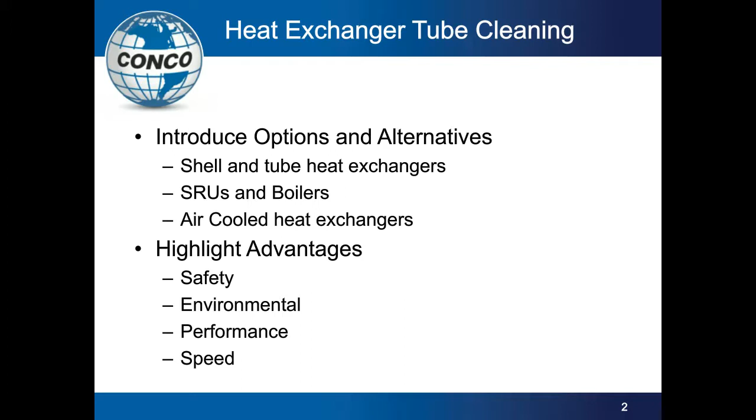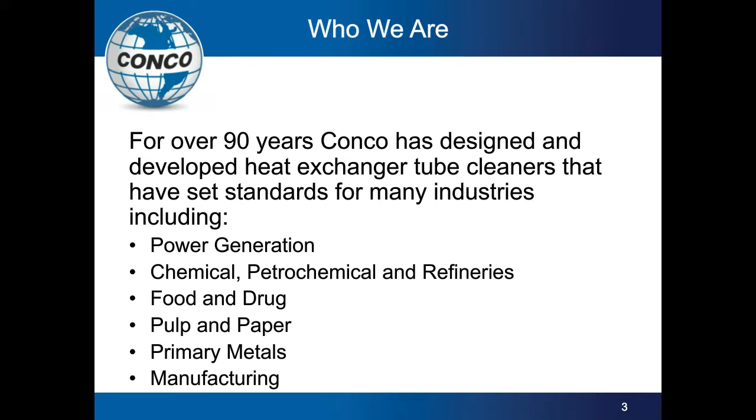Who we are: we've been around for 90 years. We are the leader in tube cleaning in the power generation field, and we're gaining a lot of market share and ground in chemicals, petrochemicals, and refineries. We have also worked in food and drug, pulp and paper, primary metals, and manufacturing.

Our tube cleaning technology uses custom-sized mechanical cleaners, drill bits, and brushes at a safe, low pressure or no water at all to thoroughly clean heat exchangers of all shapes and sizes. The difference is our technology is one of a kind, which maximizes safety, minimizes impact to the environment, produces a cleaner tube, and the key is at a much faster pace than high-pressure water.

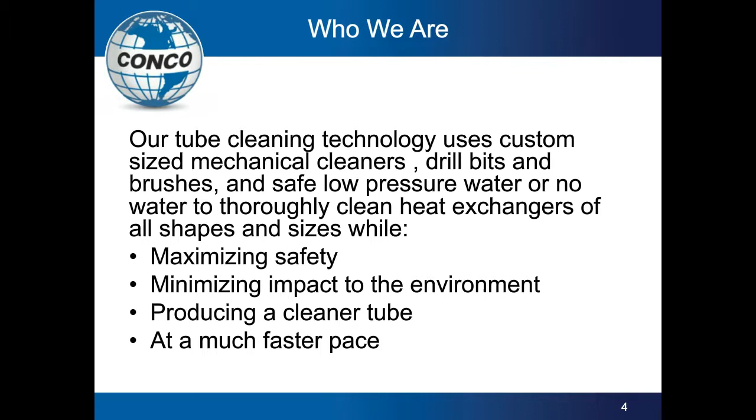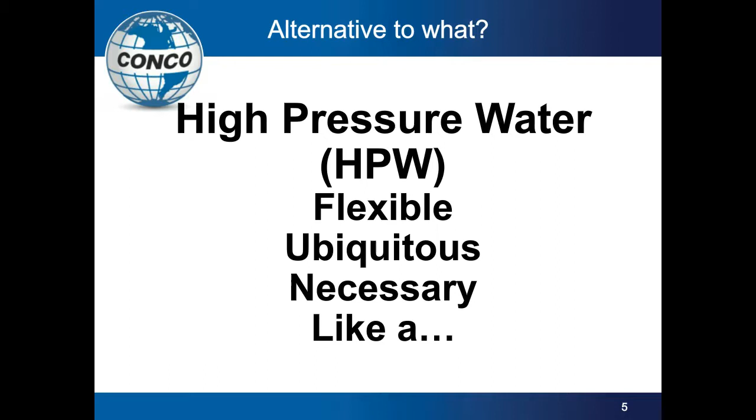High-pressure water is what most people are used to. It is the common choice when cleaning heat exchangers and heat exchanger tubes because it's flexible, ubiquitous, and necessary, like a hammer and a nail. But at Conco, we like to say you need options. You can see my wonderful tool room with all the different pieces of equipment. I probably need to update that a little bit. But we are the option.

As I mentioned earlier, Conco is safer, faster, cleaner, and one of the leading factors is a whole lot less water, which makes it environmentally friendly. Water is one of the main things I hear talked about when I visit chemical plants and refineries: either water all over the place around people so they can't work in it, or they have to process it and the cost of that. Well, we use a lot less water than high-pressure water.

We have a video here that gives you a visual of our services. It leads off into what we do and says a lot about Conco and what we have to offer. Hopefully you have the video maximized so you can watch this, but let's play the video.

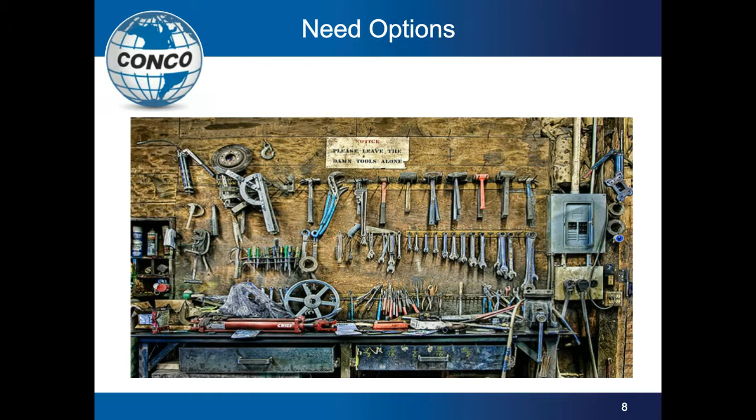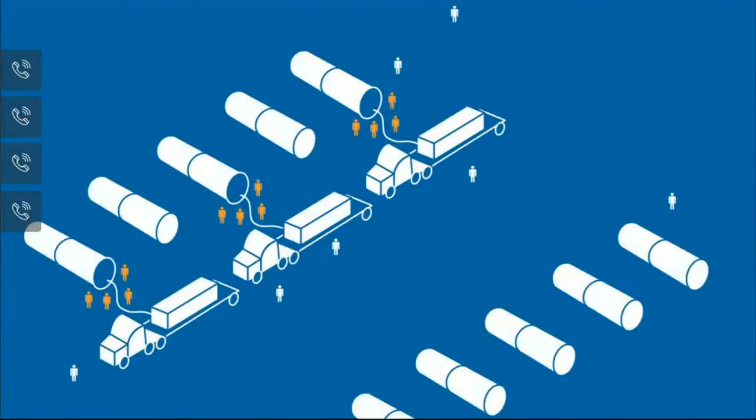Fast, safe, and test-ready clean. These are the benefits our customers enjoy on every job. For example, what would it take to clean 21 heat exchangers? What are your accepted trade-offs when using high-pressure water cleaning, in safety, time, wastewater, and performance? Are you measuring this? We are.

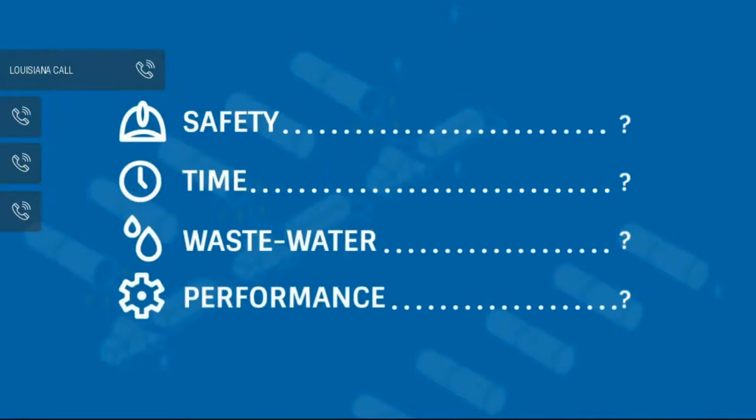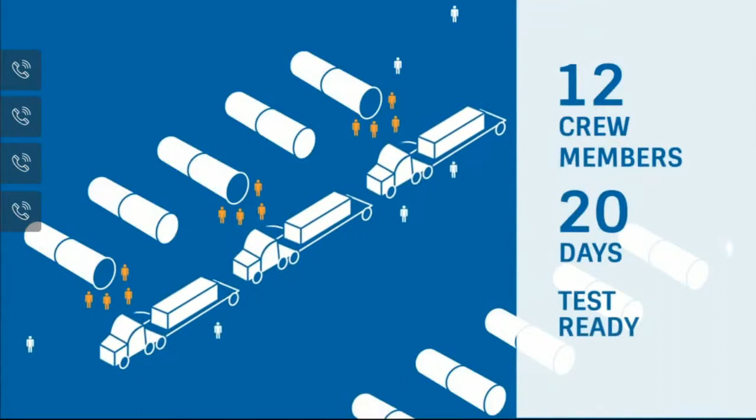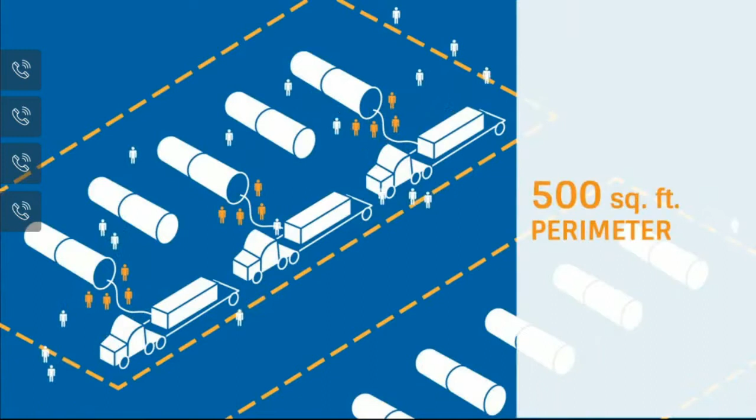Our research has shown that this particular job would typically use high-pressure water to complete the task. It would take a crew approximately 20 days to successfully clean these exchangers to test-ready standards, with a common risk of rework to get them test-ready. Safety is always the number one priority. Because high-pressure water can cut and kill, this 12-person crew would need an average safety footprint of at least 500 square feet to work, restricting your ability to work around the equipment being cleaned.

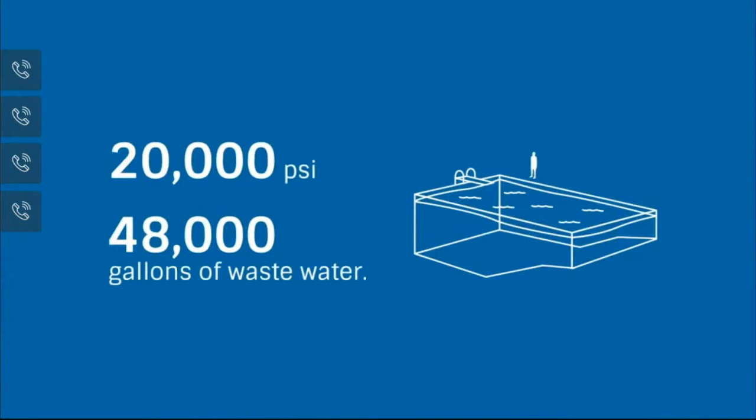And when the job is complete, using high-pressure water, you'll be required to send approximately 48,000 gallons of water to waste treatment to clean each exchanger. At Conco, we use low-pressure water, a patented, proven tube cleaning method for many decades, to deliver superior safety and performance over high-pressure water in many common applications.

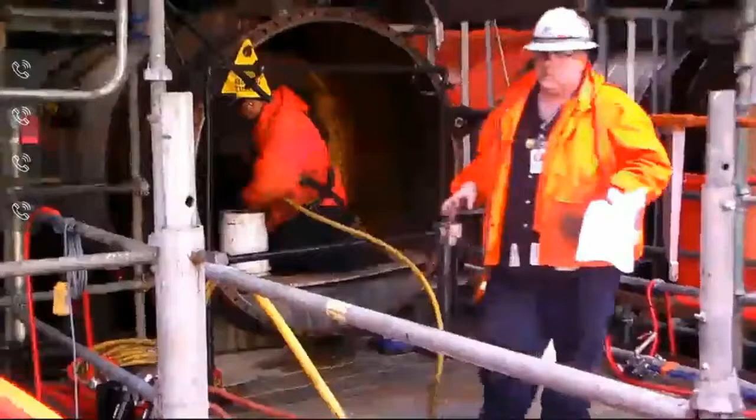Here's how it stacks up. Conco works in a nimble fashion, clean in place, on the pad, with your team or other contractors, seamlessly. On the exact same 21 exchanger job using low-pressure water, Conco only needs a crew of 5 and just 5 days to complete test-ready standards compared to 12 crew and 20 days.

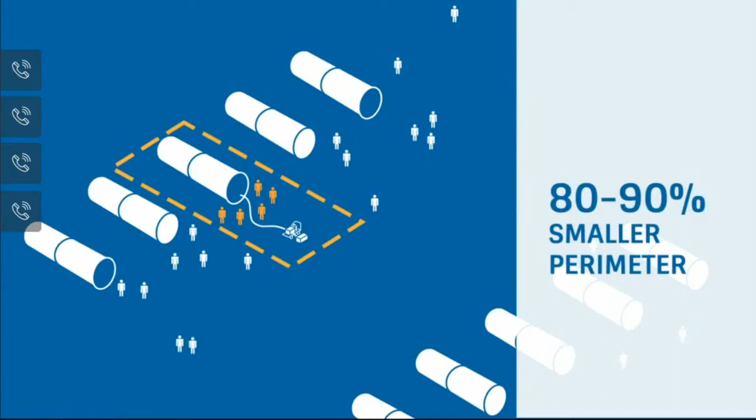Because our footprint is so small, your team has the ability to work around us rather than wait until the cleaning crew is finished. Our ability to quickly turn around test-ready exchangers results in a shorter turnaround for critical path jobs. This may give you the opportunity to re-engineer your turnaround schedule to save time. What is the value of 1 extra day's production?

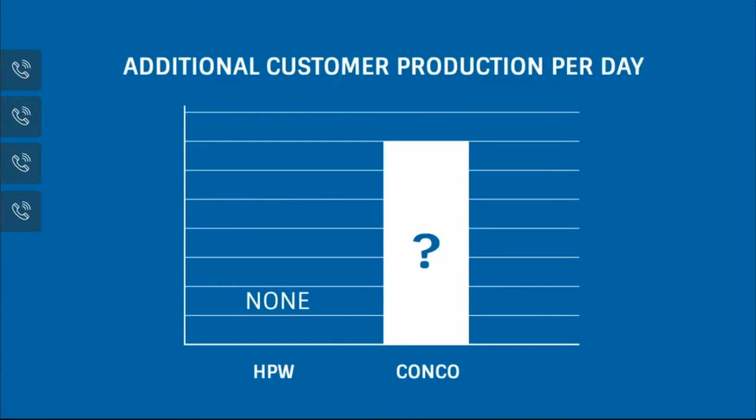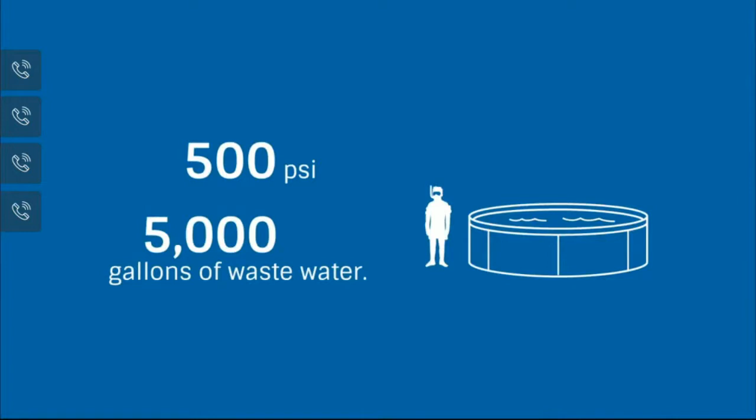And with low-pressure water, you'll have 80 to 90% less wastewater. Lower pressure, less people, smaller footprint, and faster time all contribute to a safer plant site. And we're proud to have 0 OSHA recordable safety incidents in our industrial services group since 2008.

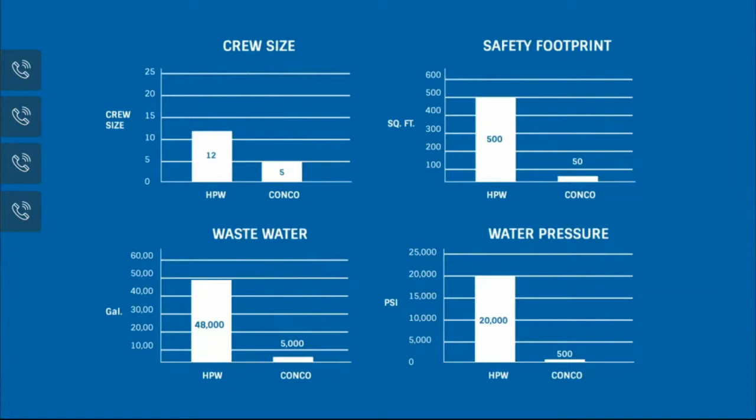So, what does all this mean for you? If you're responsible for heat exchanger maintenance, Conco is the partner to help you achieve the safest, fastest, cleanest, most profitable exchanger cleaning. Let us help you identify where Conco can add the most value at your facility.

All right. I hope that gave y'all some good information and a visual about what Conco does. One of the proudest things we are about at Conco is the fact that we've been 10 years, going on 11 years without a recordable incident. We work every day to make sure that our employees go home safe because they're not just employees, they're brothers, sisters, moms, dads, and we are very proud of the fact that we are a safe company and have not had a recordable injury in over 10 years.

Now we'll talk about the 3 main pieces of equipment and services that we offer. They all come on one system when we go to clean tubes for you. We'll talk about other services toward the end that are more specialty, but these are the 3 main pieces of equipment that you will see when Conco shows up to clean tubes on your job site. There are the TruFit, the Hydrodrill, and the Excalibur.

Again, I'll start off with a video that shows you these 3 services, and then we'll go into more details on each slide after that to talk about the particular individual pieces of equipment. Let's play the video.

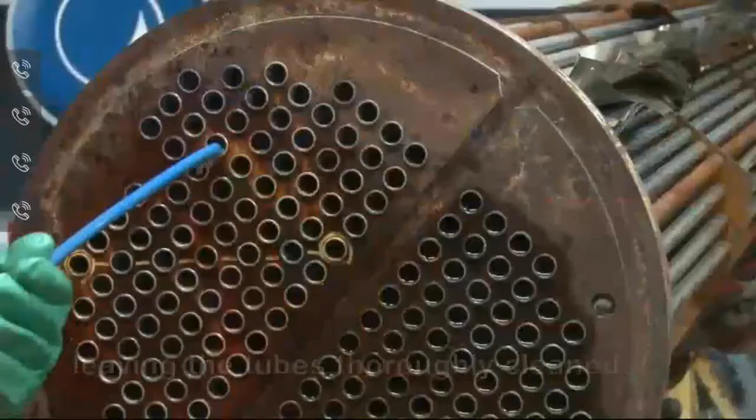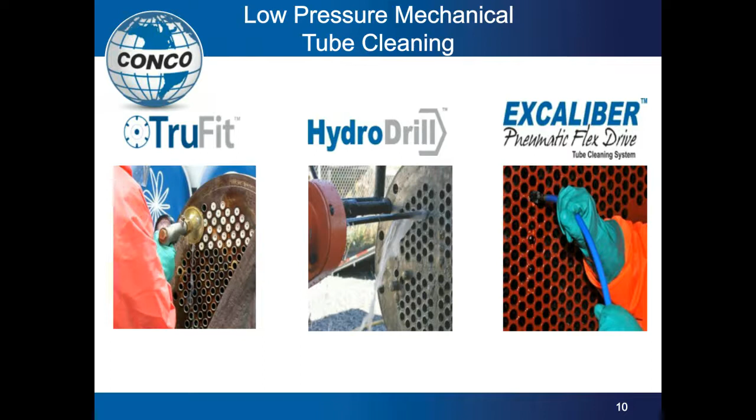All right. As you saw from the video, the main thing Conco is known for are our TruFit tube cleaning system and cleaners. We invented this technology back in 1923 and have advanced it through the past 90-odd years to make it a better product. The unique thing about our cleaners is the fact that it is TruFit. We make the cleaner to the I.D. size of your tube, to the exact measurement. We do not have to adjust them in the field or any of that. They are made to the size of your tube, making it more effective.

They are spring-loaded to where they are 5 thousandths over the size of the tube, compressed down, and they keep 100% contact with the tube at all times going through it, where you get a better clean so you're able to test these exchanger tubes. The water pressure is at 200 to 450 psi normally, with a max of about 700 to 750. So our tube cleaners have no way of becoming any type of projectile because our pumps will not go up that high. We do not make pumps to shoot any more pressure than 750 psi for the mere fact that it does not become a safety hazard at all.

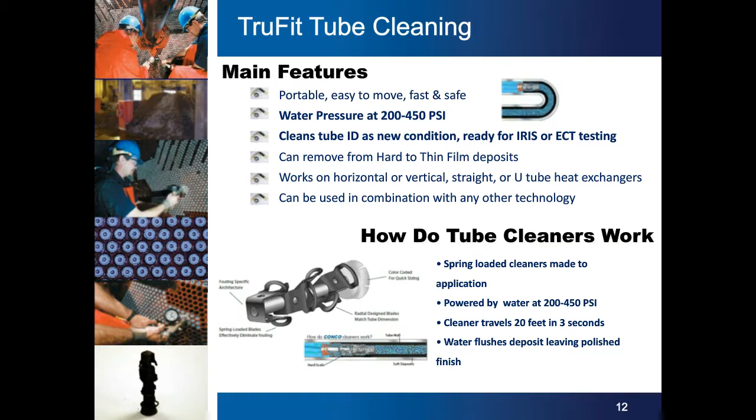The other tube clean we do is with our Excaliber. It is a flexible shaft-driven cleaning system with either a brush or a drill bit on the end. It can clean heat exchangers vertically, horizontally, in tight spaces, up to 75 feet. It helps get tube I.D.s test ready. We know that I.D. test-ready tubes have to be specially cleaned, almost to new metal.

When we have a brush on there, we can get into the pit holes of the exchanger and help take out any deposit left in there. It's also used anytime you have a coating or a soft tube; we can use a brush that will not interfere with or hurt whatever coating or soft tube you have. We need water and air to run it.

It is especially good for sulfur recovery tubes that are having a problem getting I.D.s clean. We are very successful in doing those. You usually can clean about 600 tubes a shift, 20 foot long. You're looking at 1 minute a tube, so that's about what we figure for 20 feet.

As best practice, the tubes should be opened up where we can get in there. But if there are plugged tubes, we can use a drill bit on the end of the Excaliber to clean the tubes out. Very fast and very efficient.

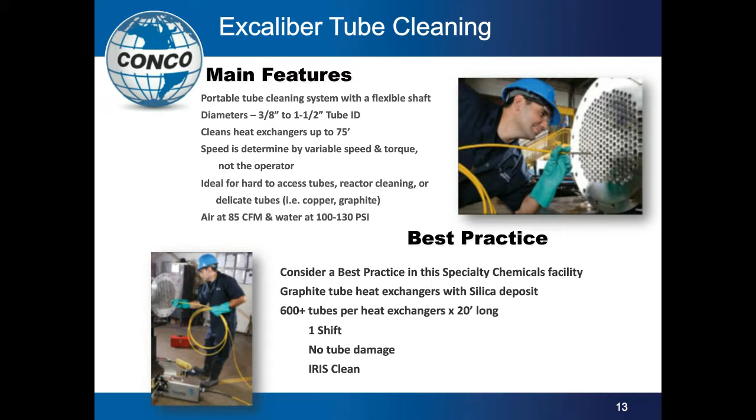We have also set up with Stone Age a hands-free system where we do not have to touch the equipment whatsoever. So if we need to be hands-free, we know that's the way the practice is going, so we have that offered and the capability of doing that. So it is a small footprint, with the ability to clean in place or U-bends. This is the benefit of what we have with our tube cleaning.

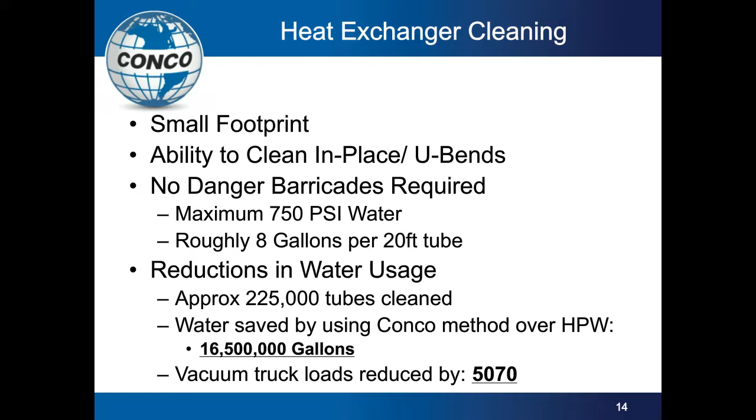No danger, due to the fact of the maximum water PSI, and roughly 8 gallons per 20 foot of tube. So with one customer, they had 225,000 tubes cleaned and over 16,500,000 gallons of water not used. We reduced their vacuum truck loads, because they had to contain the water, by 5,070. Also, the use of their frac tanks was a lot less. So with our method of cleaning, you will see a whole lot less water and a lot less cleanup.

So what are our advantages? Safety. As I talked about before, we have not had a recordable incident in our industrial services group in over 10 years, and we have an overall TRIR in 2018 of 0.5, one of the leaders in the country with that TRIR. We have also recently been named a finalist for the Houston Area Safety Council Awards. We will be going through that process, one of 3 companies in the small environmental category. So we are proud of the fact that we are very safe.

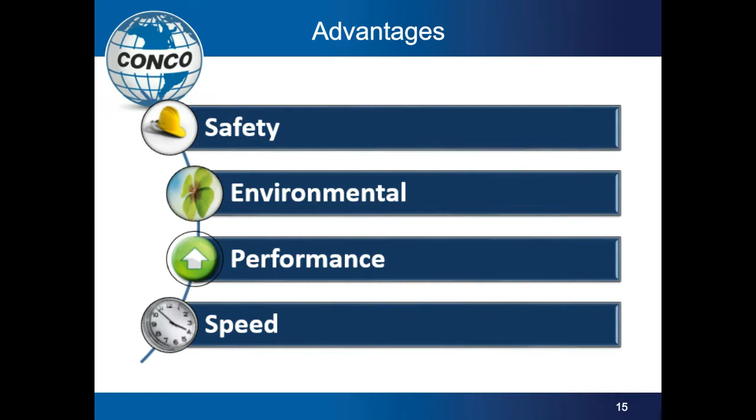Environmentally friendly because of a lot less water. Performance: we keep 100% contact with the tube, whereas at times with high pressure water, you will get a rifling effect. And the speed: when we are the right fit, there is nobody faster at cleaning and getting your tubes test ready. One of the main reasons we're safe is we're below 350 PSI on average, whereas high pressure water can be anywhere from 10,000 to 40,000 PSI.

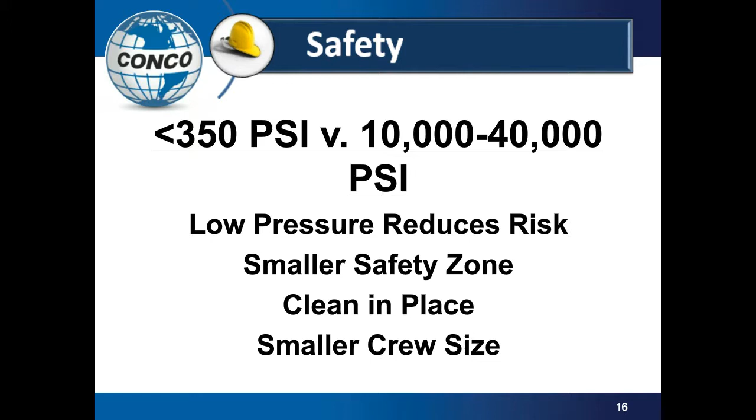With that, you have a bigger safety zone and people can't work around you because of the high pressure water. We are also a big factor in clean in place. Because we're low pressure with a lot less water, you have a lot less worry and people can work around us, so you do not have to remove the bundle and bring it to a pad or off-site. Very small crew size: our average crew size for cleaning an exchanger is 3 people, a supervisor and 2 technicians. So we're a small footprint, less water.

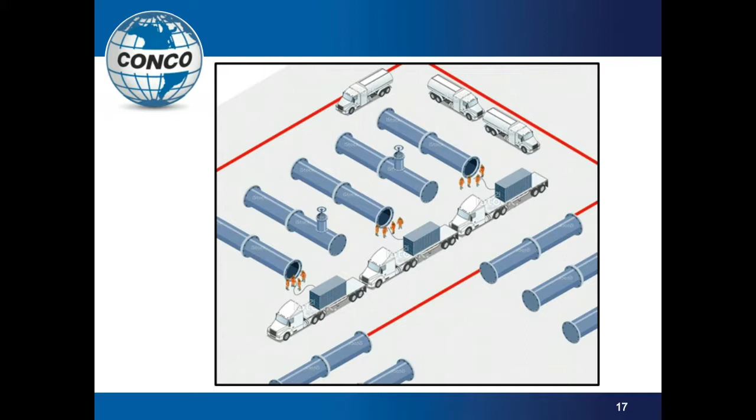As you can see in the diagram here, this is normal with high pressure water. You have a much bigger safety zone than you see with us. A lot less water, as we talked about before. This is an example: on a 5,000 tube heat exchanger, using 10K, you're going to use around 200,000 gallons of water. With us, 8,750. A lot less water, not only on the ground, but sprayed all over the place, and a lot less cleanup.

We can contain our water completely, no matter how high up in the unit or what's around us. We can tarp, and we have special ways of making sure that the water, if it needs to be 100% contained for whatever reason, can be.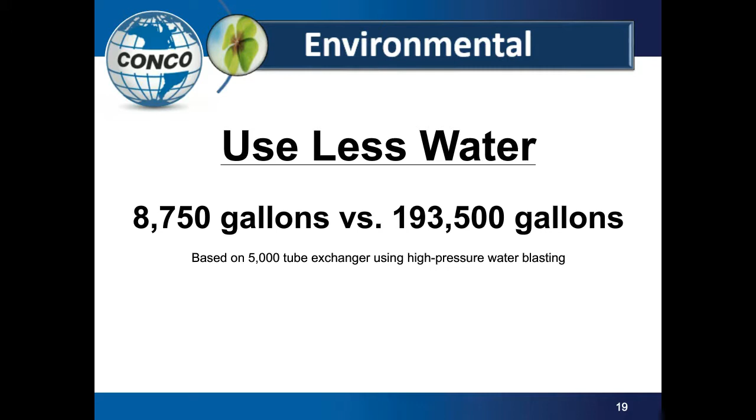Like I talked about before, we're the only ones out there at the moment that can clean around U-bends. A lot of pluggage or problems with U-tubes are due to the fact that you can't get the U-bends cleaned. We have done a lot of U-bend cleaning for different companies out there, and work with different high pressure water contractors to help get their U-bends cleaned.

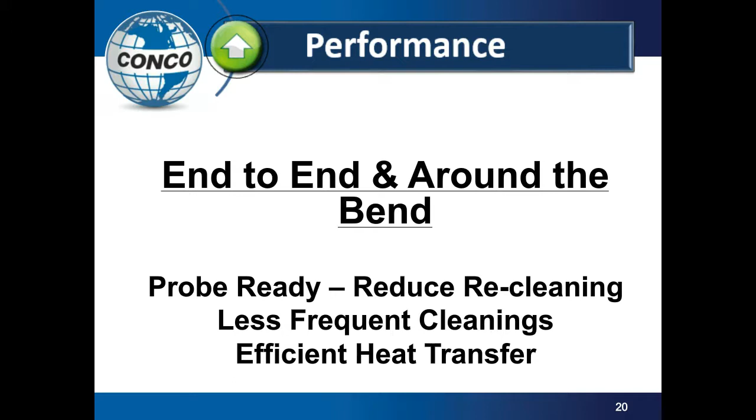It is a normal working practice for many refineries who are having problems with U-bends that we either open it up with hydro-drill ourselves or follow their high-pressure water to clean around the U-bends. Very effective, especially when you've got to get them test ready.

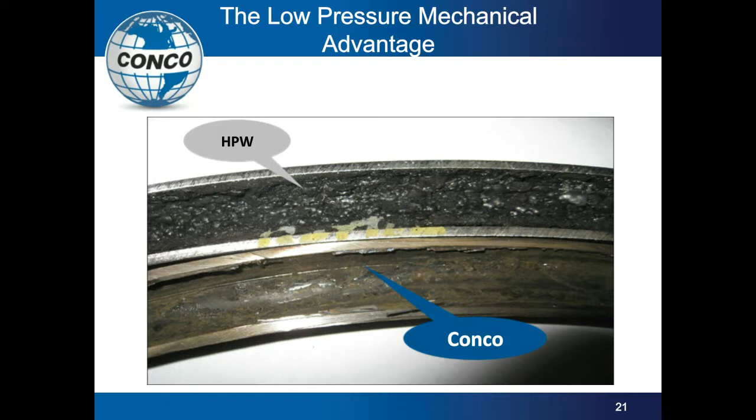So speed. We are a smaller footprint with less people, and we can travel through a tube in 2 to 3 seconds. So you're looking at up to sometimes 70% less, hours versus shifts, and back up and running when you need to, with a smaller safety zone, less congestion in your unit. We do not add to the ant pile.

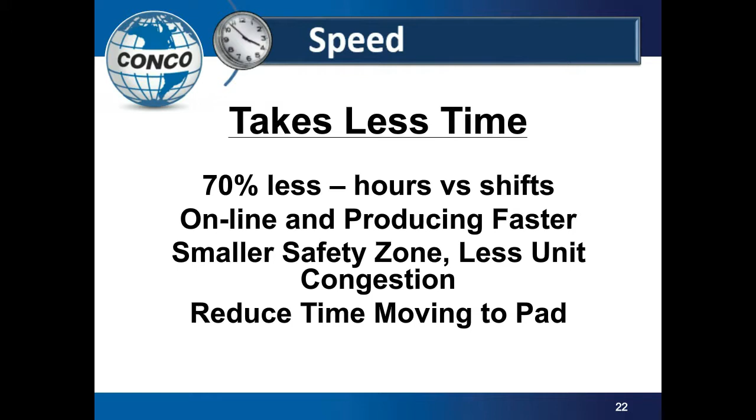With less people and less equipment, when you have a turnaround and a lot of people in there, Conco is the top choice because we are not adding to the ant pile. We are taking away from it, nor do we have to shut down other work while we're cleaning. So that pretty much tells you about our low pressure mechanical tube cleaning. It's safer, environmentally friendly, effective, and faster.

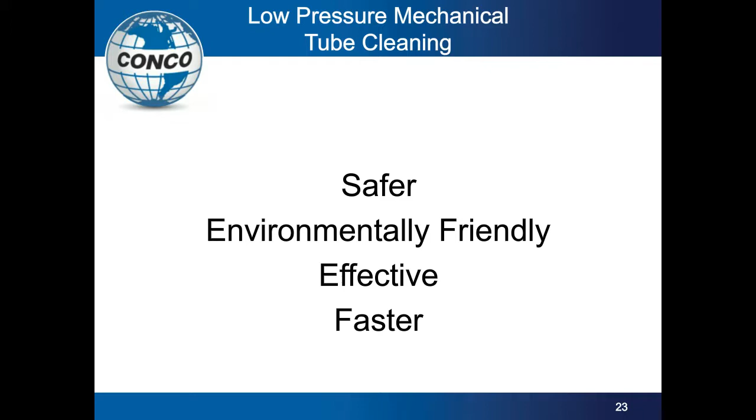We're very proud of the fact that when we are chosen to do work for our different partners out there, they choose us for the top 2 reasons of being safer and more environmentally friendly. We're proud to say that. It's something that we preach and talk about every day.

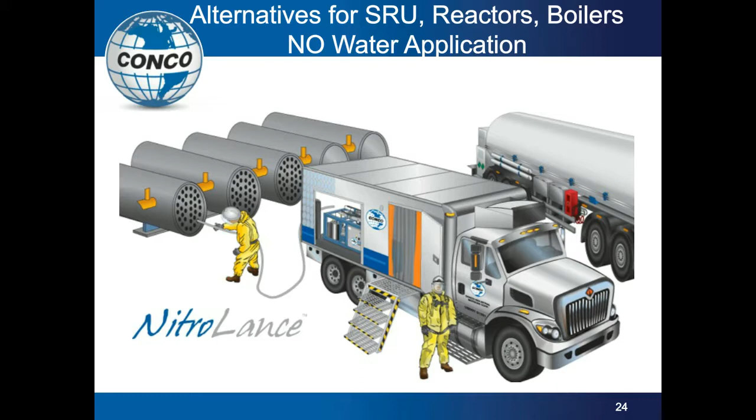So we have other alternatives. One of the unique ways of cleaning we have is called the NitroLance. It is liquid nitrogen that is shot through the tubes, and when it goes from a liquid to a gas, it expands over 700 times, getting into the cracks and crevices of the tubes and demolishing and removing the deposit.

The neat thing about this, it's a dry clean, so if you have any type of cleaning out there where you're worried about water or the reaction of water in your exchanger, or any type of wetness you do not want, this is an alternative. We do a lot of sulfur recovery units for our customers out there, very effective, very fast, and the other neat thing about the nitrogen is that it dissipates into the atmosphere, so you are left with just the deposit.

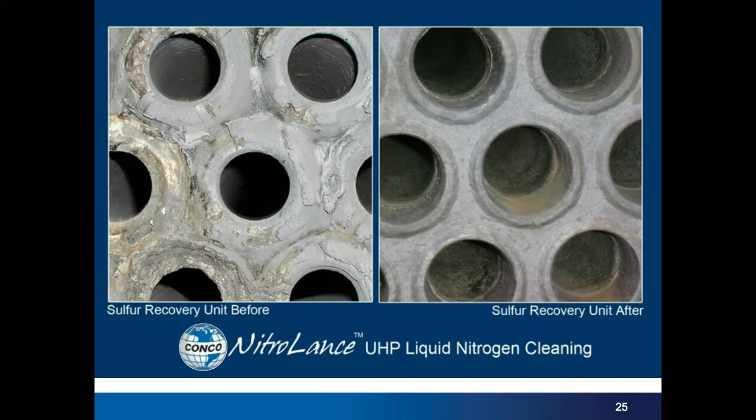A lot of people ask about the safety of liquid nitrogen. We understand nitrogen is the silent killer, but the fact is it's more prevalent in the actual atmosphere than oxygen is. It dissipates very fast, so there are no issues with that. As long as you keep air moving through the system, we've never had any situation where there's oxygen deprivation in the atmosphere. We do wear fresh air masks just to be on the safe side, but liquid nitrogen is very effective in cleaning sulfur or any hard, dry, porous stuff that 40 and 50K cannot clean.

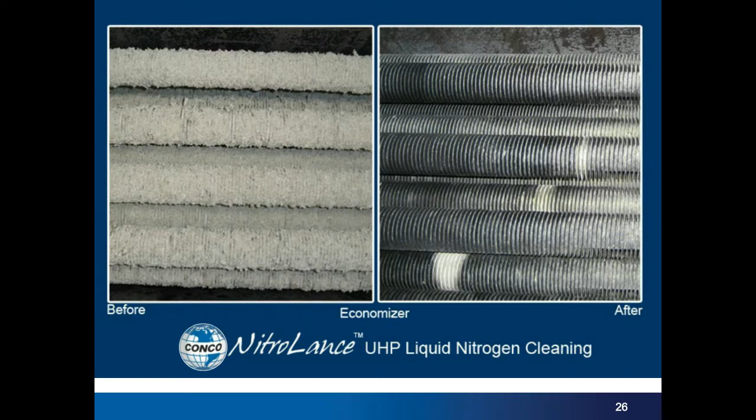As you saw in the previous video, those are sulfur recovery tubes. Here are some fin tubes that we cleaned in an economizer. You can see that the pressure does not clean or damage the fins at all. The pressure's there just to deliver a short burst when it's going from a liquid to a gas. Once it gets in the cracks and crevices of the deposit and it goes from a liquid to gas, it expands 700 times, and that is what does the cleaning.

As we talked about safety, the LN2 dissipates quickly. We have a hands-free option for the operation of this also, that we work with Stone Age on. It reduces the creation of caustic gases and waste, a lot less waste that you have to worry about than when hydroblasting. It's environmentally friendly because of the less waste, and it eliminates cross-contamination and secondary waste. It cleans the uncleanable units.

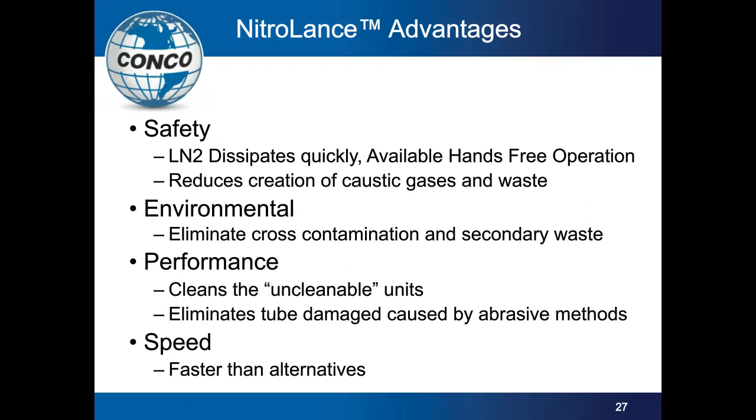A lot of people out there have tried 50, 60K with no luck, whereas LN2 has been effective and faster than alternatives, because you'll know real quick whether the liquid nitrogen will clean the tubes or not, or the surface.

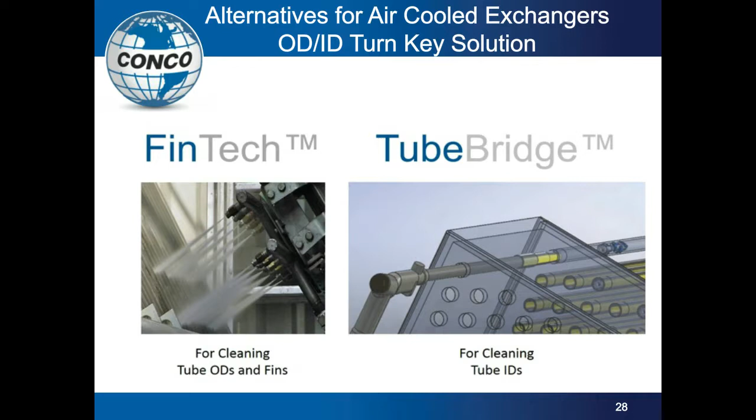Another alternative we have to cleaning is our FinTech system, which is an OD tube cleaning system. And we have our tube bridge system for cleaning the tube IDs. We'll talk about that a little bit, but very effective cleaning method for your air-cooled exchangers for the ODs and IDs of them. As you can see, here's the FinTech before and after picture.

With the FinTech, let me go back a slide here. A lot of people use FinFoam or other systems. Our system is basically water that is set with 12 nozzles at about 1,800 PSI with a high gallons per minute, and it creates a very thorough clean of the OD of the tubes.

It is hands-free, robotic. Once it's set up on top, there is nobody walking on top of your tubes or damaging them. And it is the most effective clean for a thicker bank to get all the way through the bottom. We can adjust the nozzles to different angles to make sure we get a thorough clean through there, whereas a lot of times with FinFoam or just plain water hose cleaning, you're only cleaning the top of the exchanger.

One of our customers over the past summer saw an immediate drop of 80 degrees in their unit after we had cleaned, and they've never experienced that. Also, the system can still be running. The fans just need to be off for us to clean this.

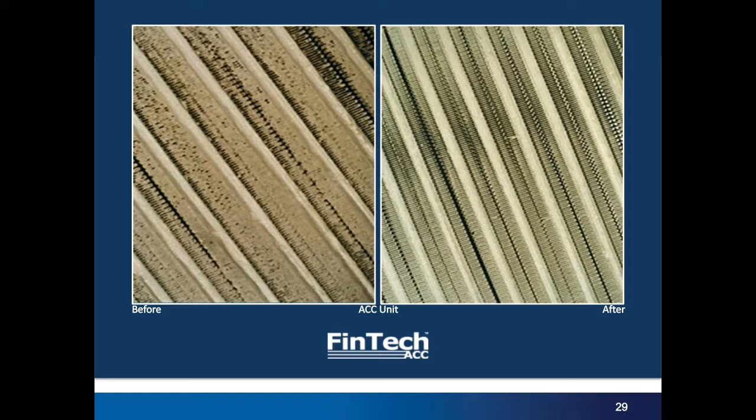With the tube bridge, we basically build a bridge between the header box and the tube sheet of the exchanger, and then we use our TruFits to shoot through the tubes, or our Excalibur if we need to open them up or brush them. It's very effective. We are getting tube IDs clean that customers have never seen before, which is a huge benefit to them.

On top of that, we can control all our water. Most of your ACC units are up in the air, so you're working above people, and this will allow us to contain or control our water where nobody beneath us knows that we're even up there.

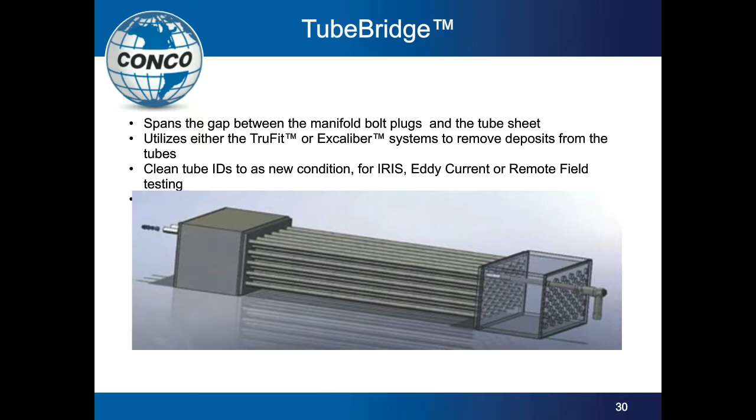Also, you are getting no deposit in the header box because of these tube bridges, so we're not adding to the deposit or just dumping everything we're pushing out of those tubes into the header box. We are actually pushing it further outside of the exchanger altogether. Very effective cleaning, and growing every day, it is being used by our customers to clean the ID of their tubes.

Here are some advantages of the FinTech. Again, the safety: safer operators, prevents fin damage. Like we talked about, you will not have anybody on top of your units affecting the fins of your units. Our water, we're not putting any type of chemicals in there. It is strictly water. There's no additives or anything.

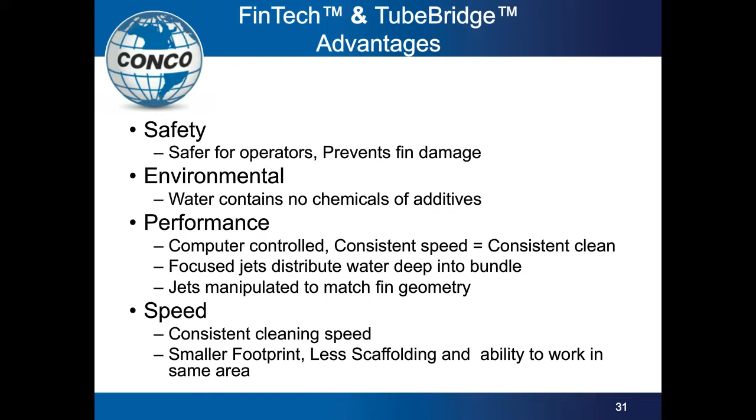Performance of it, we're computer controlled as far as the FinTech, so it's a consistent speed with a consistent clean. Like I talked about, the jets distribute water deep into the bundle, and you can manipulate the geometry to match whatever fin you have. Then the speed, with a consistent speed, you get a consistent clean. And again, as always, we're a smaller footprint, less scaffolding, and have the ability to work in the same area. So people can work around us while we do this.

So that pretty much wraps up our presentation, but remember, you have options like we talked about. Conco is growing in the petrochemical and refinery arena. We have contracts with most major players out there and work with them on a daily, consistent basis. And we are the leaders that clean more tube IDs than anyone in the country. So when it comes to regular cleaning or trouble cleaning, Conco has an answer on your tube IDs.

We also offer and are starting to do tube testing for eddy current and RFTs for many of our clients, which is making it seamless. You do not have to worry about a different contractor. As the end user, you have the same person cleaning and testing, which saves you downtime and is more effective, which gets your exchangers tested and back online faster.

So that is pretty much what we have to offer today. Any questions out there, I'll be glad to answer. Great. Thanks, Tim. Yes, we have a few questions, and this now begins our Q&A session.

The first one, how do you determine when to use a hydro drill versus a TruFit system? The hydro drill versus a TruFit is basically if the tubes are blocked or plugged in any type of manner.